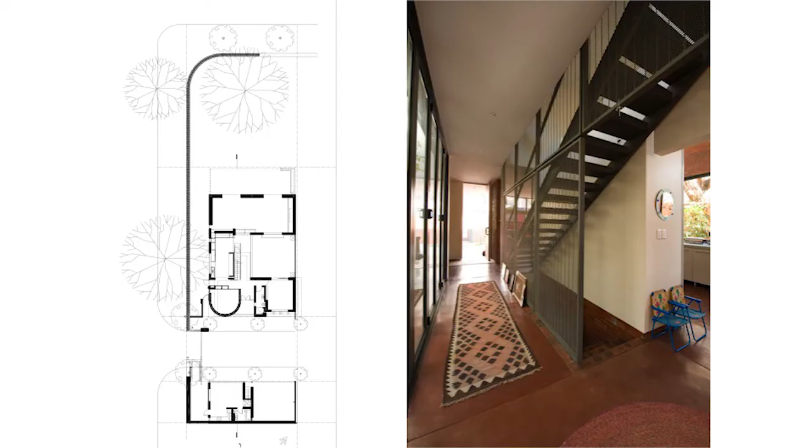Okay. Importantly also, all the units, although they deliberately share some materials and architectural elements, are all very different in plan. The houses become kind of demonstrations of the multiple design possibilities within the parameter of an identical site with similar accommodation and social requirements. The row house and the courtyard typology allow for both privacy and efficient use of space.

So here you can see unit number 1, Lael's unit. I think Lael's sitting here today. And it has a courtyard over here. Here's the street, and it has an outbuilding over here and the garden. And it's the end unit, and you can see a picture of the passage space. This is our own unit, unit number 3.

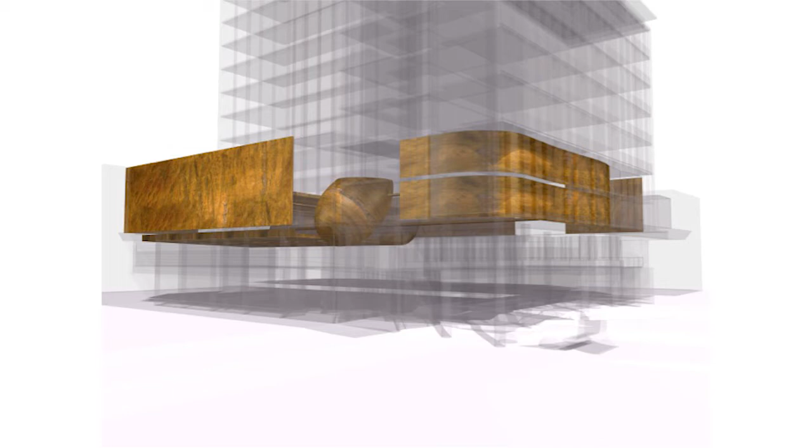So once again, when we return to the Wits Art Museum project, this is one of the very early competition sketches. And it's fascinating to look at it now because it really is very close to where we got to with the project. It illustrates the very strong idea of storing the collection, which was a big component of the project, to store the massive collection of African art and South African art in a very carefully climate-controlled way. The idea was to really expose that and show that from the outside and from within the gallery.

And then at street level, we really wanted to open the gallery up so that pedestrians could really interact with the exhibitions and be drawn into the building. So that's evident on Jorissen Street, where you can see the stores above and the open glass facade, which really pulls people in, really engages with the street.

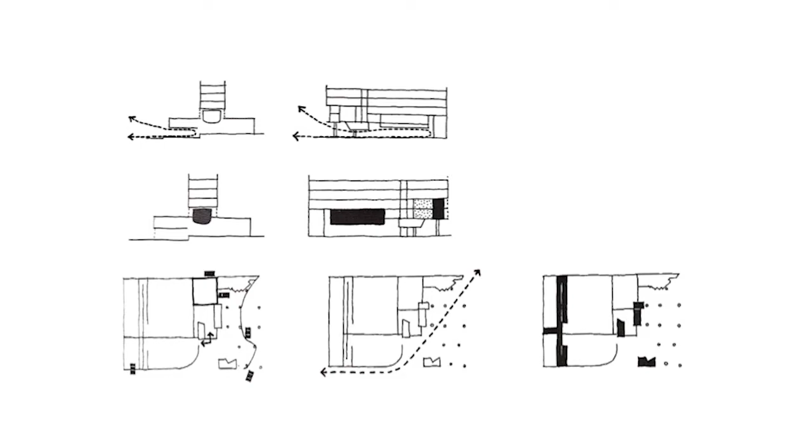And particularly the forecourt. So, the whole notion of it really becoming this gateway to the university. So really, confronting access to the university at a time when security was such an issue. We found a way of doing it. We differed a lot with our clients at the time, but these very early concept sketches illustrate this desire that we had to connect to the street underneath the stores.

And this shows the stores above. These are very early drawings. And here, this is the forecourt area, and all these drawings show how permeable we wanted the gallery to be at ground level. And we lost the battle, because as the project developed and the clients got very engaged with how they needed to work and Wits security got involved, we ended up having to put this glass screen between the pavement and the forecourt gallery.

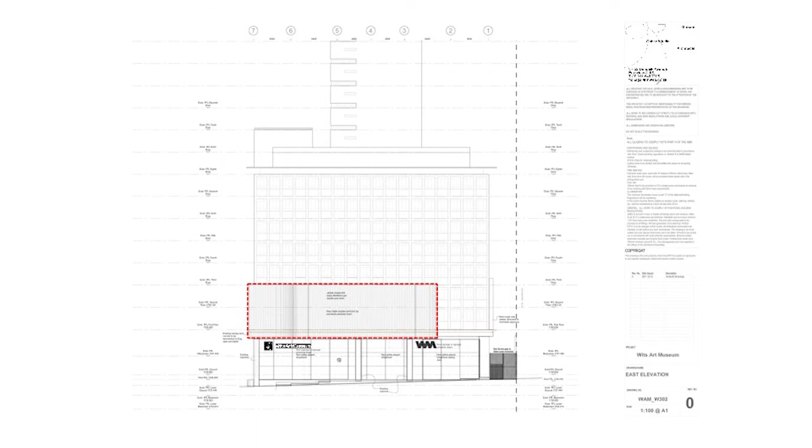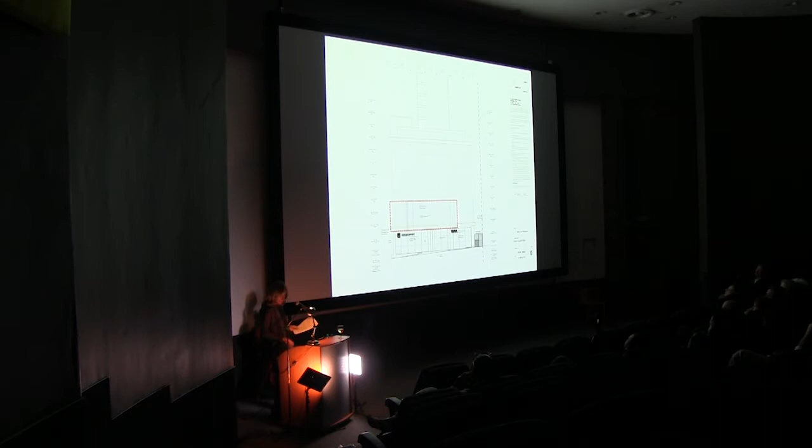And just to show everybody, a lot of people know the museum, but this is the 20-story building above, the Lawson's Tower, and these are the stores on this level and the gallery spaces below. We spent a lot of time talking, and Nina will elaborate later, on what to contain the stores in, and we arrived at the brick. And this became a real starting point for a lot of work that we continue to do in brick.

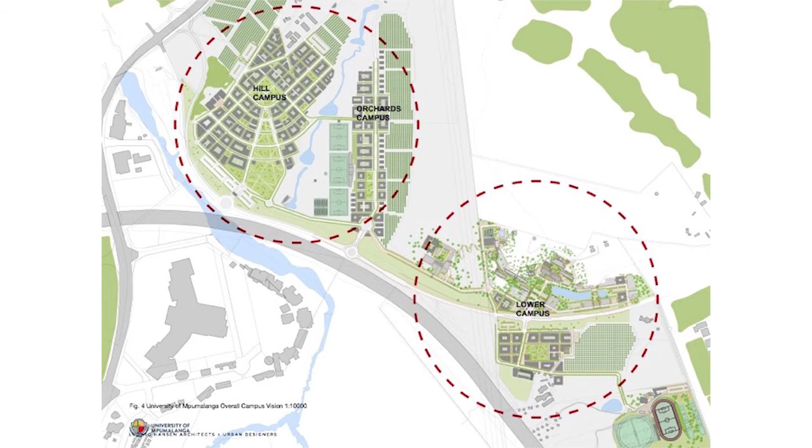Then moving on to, for the last 5 years, Nina and I have been engaged in projects for the University of Mpumalanga. I'm talking about concepts, so I don't want to delve into the whole context of that project. But just to say that the university is situated, this is in Mbombela, previously Nelspruit. The university is situated to the north. It has a strange shape. It's divided into what will be the Hilltop campus, the lower campus, and the Orchards campus. We work within a spatial framework done by Ludwig Hansen, and this is the area in which Nina, myself, and 3 other practices have built buildings.

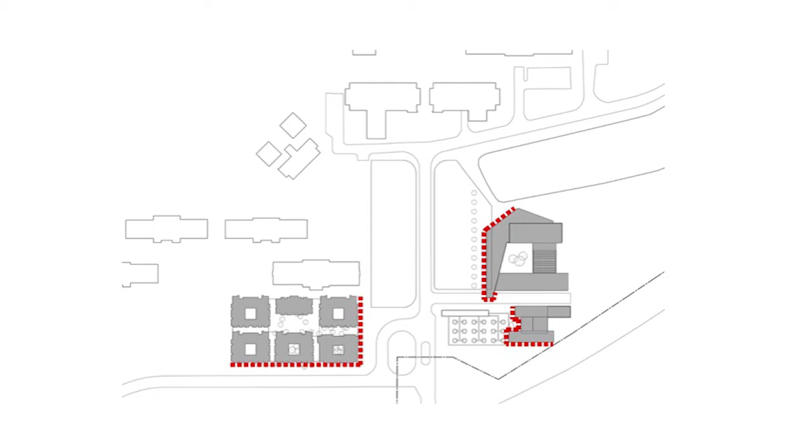It had to have a very hard edge to the square. It had to really act as both the buildings we worked on. We looked at trying to really create buildings that structure the square, one of the university squares between. And we came up with this notion of a wall. So this became our driving conceptual idea, where we would wrap a wall around a courtyard, and this wall would become this expressive element that protected from the harsh climate, because Mpumalanga, Nelspruit, Mbombela is extremely hot. And we needed to protect from the northwest sun.

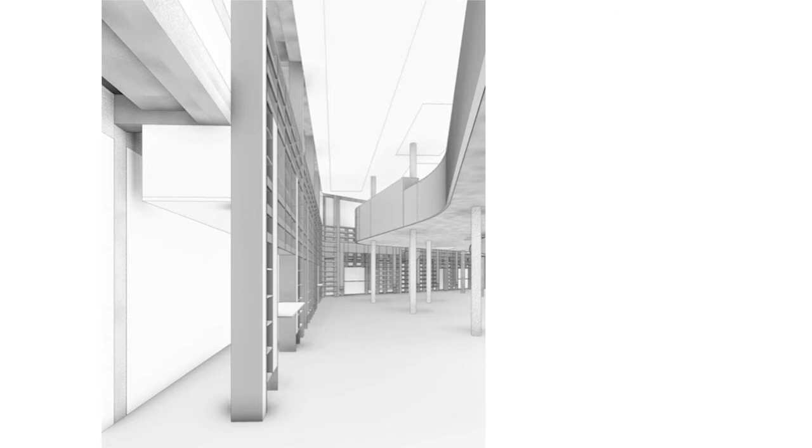So these are early developments where our idea was that it would be a double-story container that hovered over the ground plane. The project also housed an IT center, an auditorium, and some other facilities. And there again, we started working with brick. And Nina will go into the brick, but it became this extremely strong element protecting from the harsh light to the west.

Then within, so if that is the outside wall, we then pulled a meter away from that and created a screen of books, which really followed the curve of the external wall. And the section through the library shows how the body of the library hovers above what is once again the kind of theme we were dealing with in WAM, quite a permeable ground plane, which mediates public and private. And between that, a courtyard. So allowing the whole building to open into a courtyard space, which we will elaborate on later.

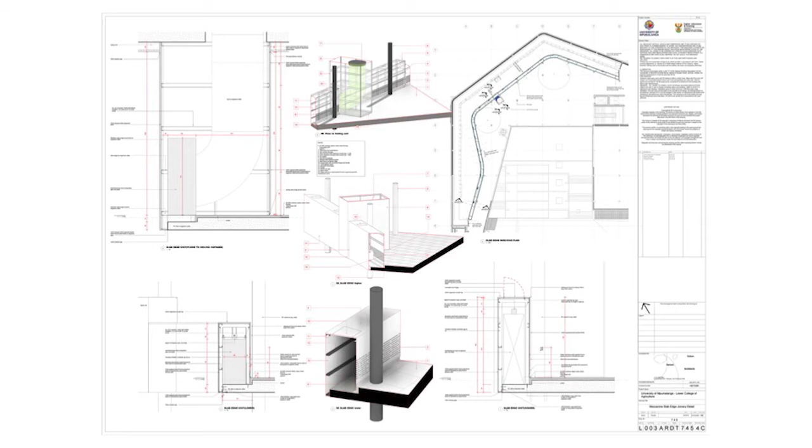And then the wall, the element of the wall, so this thickened wall with the book stacks pulling away from it. We also worked with quite an evolved system of ventilation, displacement ventilation, which we had to really try and integrate. It uses 30% less energy, but its ducting is massive. And this just shows how we constantly held on through early sketches to our wall design. At this point, we had a penetration through it and we were entering over there. But the later iterations show the resolved plan, which is really the body of the library around a courtyard.

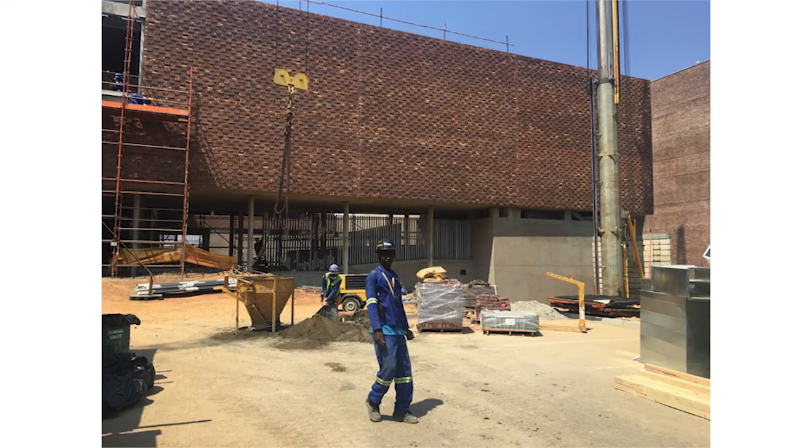And so there it sits, it hovers. It's interesting because of the very sloping site. It hovers above the ground but is almost on level with these existing quite strange water bodies. And that's it from the back and under construction. And then the bookshelves.

So we knew that because we didn't know how many books there were, we still wanted the shelving to be a very expressive element in our library. So we turned it into really a screen that houses a number of functions. So these are plenums for the displacement ventilation duct. These are obviously the bookshelves. And these are desks which are at bar stool height where people can sit and work. And up above is the balustrading level for the gantry above.

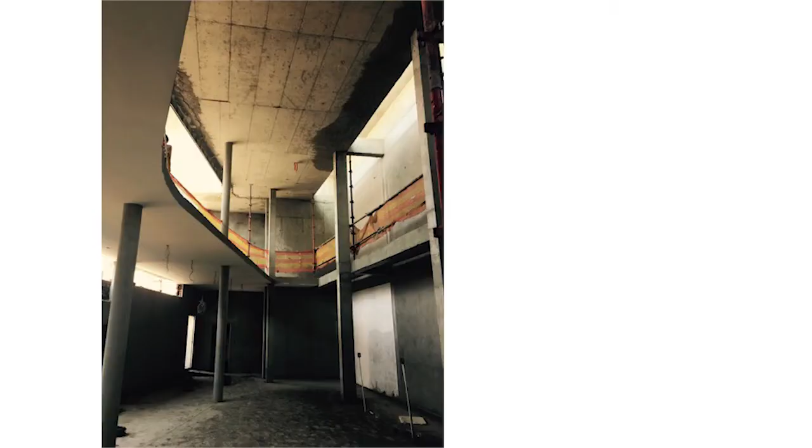So we've yet to see books in it. We are looking forward to seeing it actually open with books, which I believe it is going to soon. But it holds its own without books, and that was the idea. That's during construction. What's very nice is that the soft southeast light washes on the wall from above this and spills into the library.

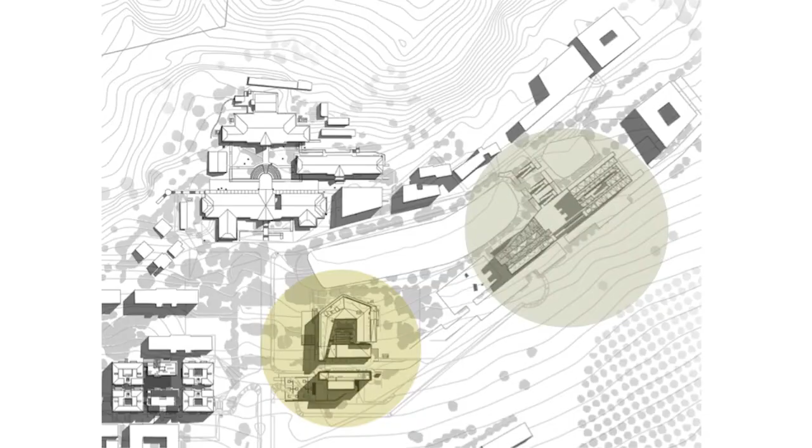Okay, then the recently completed building, and Mark Shearer is here. He worked very closely with us on this building. It's the administrative building for students, so it's where students come to register, and staff administration. And it is the termination of an axis from a long row of now very new teaching facilities up there. And there is a new public square in this place, and the road runs along the south of the building. And this particular campus actually ends here. So these buildings of ours are very prominent as you drive past the campus.

So we really felt in this building, because these two buildings were the last two buildings that we did in this phase, that they culminated in all the work we'd been doing on the other buildings. And it was this idea that we struck in the residences where we built very close together buildings which created these wonderful air channels and really started creating cool microclimates. And Nina and I became very fascinated with this notion where they would sometimes be strips and they would open out and become courtyard areas, and we sort of structured our building around this.

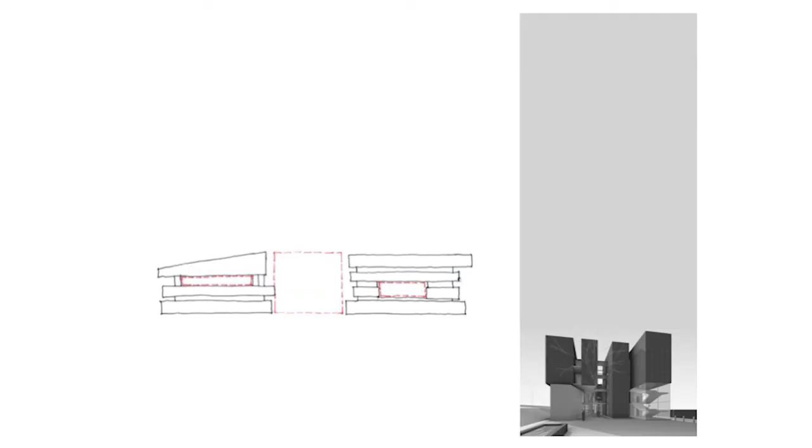So these are early conceptual sketches where we were looking at how our building bounded a large courtyard. This building has actually a first-story courtyard, and this one has a ground courtyard. But very clear is this notion of strips with thin circulation spaces that get ventilated. Here we were looking at how our building would respond to all the pedestrian routes, because it's full of students registering, it's full of staff related to student functions, and it has vehicles, possibly even buses at some point, taxis and bicycles running along the front of it.

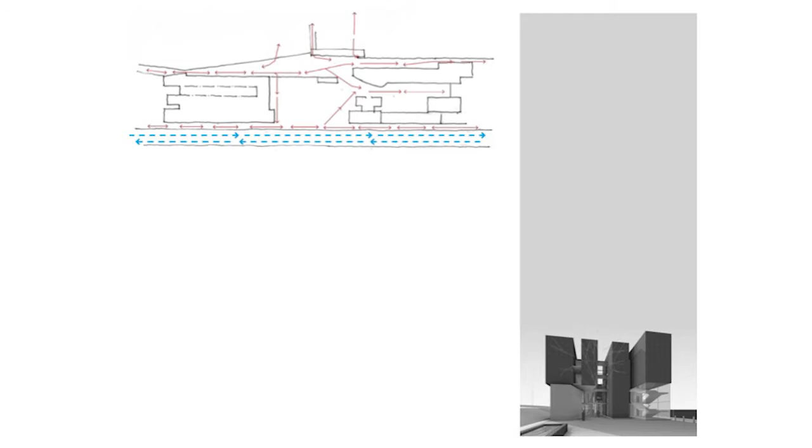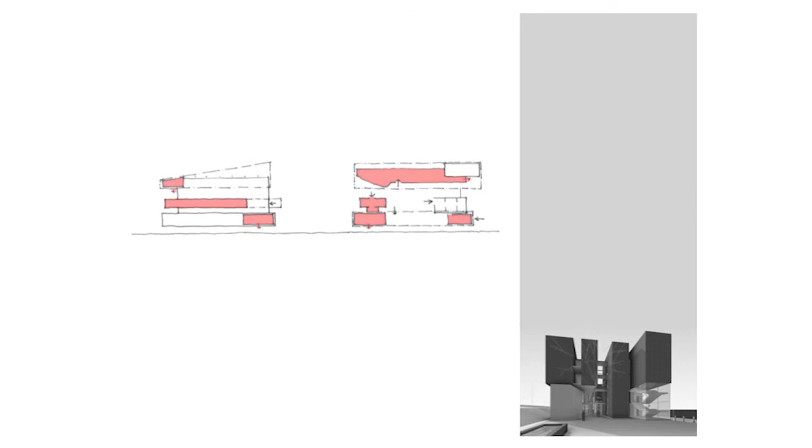We were also exploring notions of very efficient buildings. So we had two circulation cores near the square, bounding the square, and two on the north side there and there. And then the facade treatment became, well, not a challenge, but something one has to deal with: making window openings on a north facade in Mpumalanga is tricky. You can't have huge expansive openings. You need to have overhangs. And we were looking at how do we create these punctured smaller openings. And then on the south facade, because of lessons we'd learned in previous buildings, which we'll touch on later, we were looking at how do we dissolve the facade and completely open it up to views to the south.

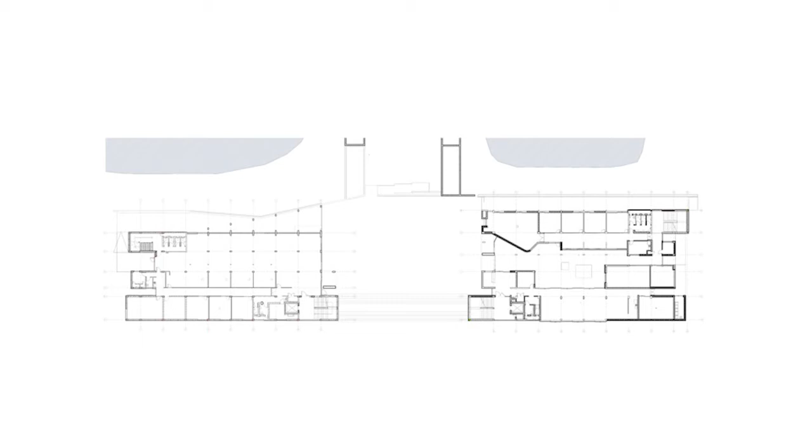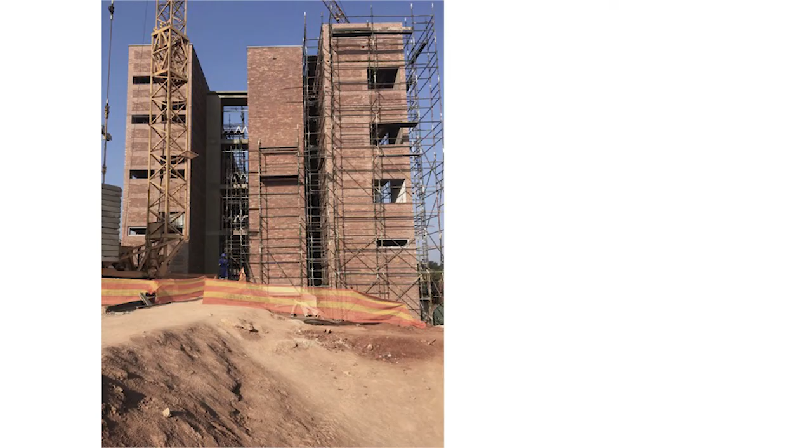And then we quite like looking at the final plans because we didn't lose the idea. We were able to hold onto the idea. And I think that's what Nina and I try and do in every single project. So these are the properly developed, built plans, which show the offices, the passages, the courtyards, and the strips. And we're proud of this building because it came in on time, thank you, Mark, and in budget, which is unheard of. So that's the resolution of the building. And Nina will talk more about the brick and how we dealt with the brick. And that's the building under construction.

Context is not only about the physical location of a project, but rather includes the social, urban, natural and economic contexts. We try to consider all of these as design drivers. We would like again to return to WAM to demonstrate how context informed the design.

The brief was to design a new 5,000 square meter museum for Wits that would have extensive gallery space and specialized storage facilities for the vast African and South African collection. The new museum was also to accommodate curators and related academic facilities and the necessary back-of-house functions.

The site was specifically allocated space in 3 adjacent buildings. The first was what's known as Dental House. It was the basement. The second was part of the Lawson's building. And the third was the building called Corner House, and it was the building which had the petrol station below it. The challenge was to seamlessly link these different buildings with individual character and structural systems.

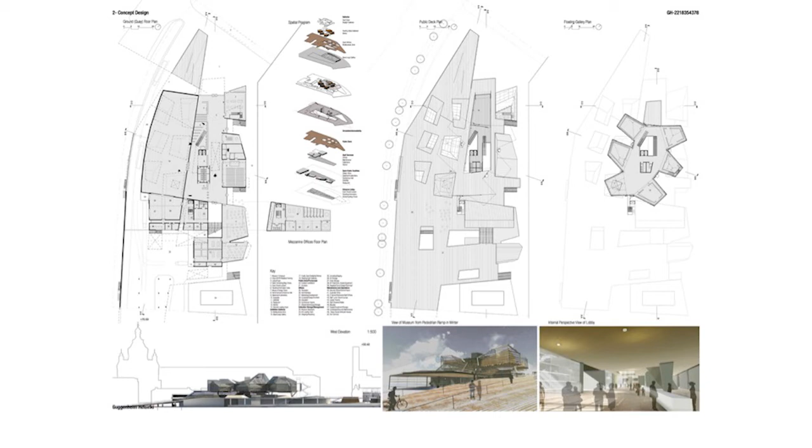So, yeah, you can see in the sections the deck with these iconic sort of timber structures, and we decided to use wood because we thought it was a good Scandinavian material.

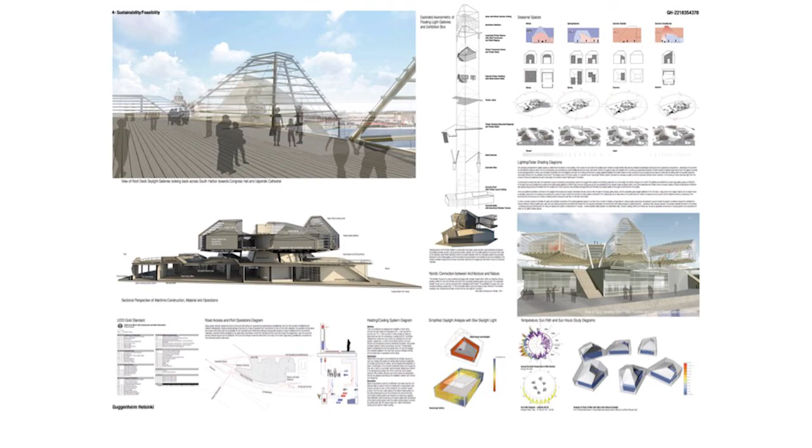Okay. So another competition, which demonstrates our response to context, is the Sol Plaatje University in Kimberley, Stage 2. The competition entry shown here was for the renovation and addition to existing buildings. The visionary urban design of the university was conceived by Ludwig Hansen. It is located in the center of the city of Kimberley. As such, it is becoming a groundbreaking urban renewal project. This renewal is evident after the first phase of its construction. Kimberley has begun to transform.

The integration with and opening towards the city reflects the attitude of equality in access to higher education in post-apartheid South Africa. The human and urban scale of the new university reflects consideration for the individual as well as the city fabric. University education is no longer only for the elite. The university building is no longer secluded in its own precinct, an ivory tower. Its public spaces are open to all in Kimberley. It is within this context that we framed our submission strategy.

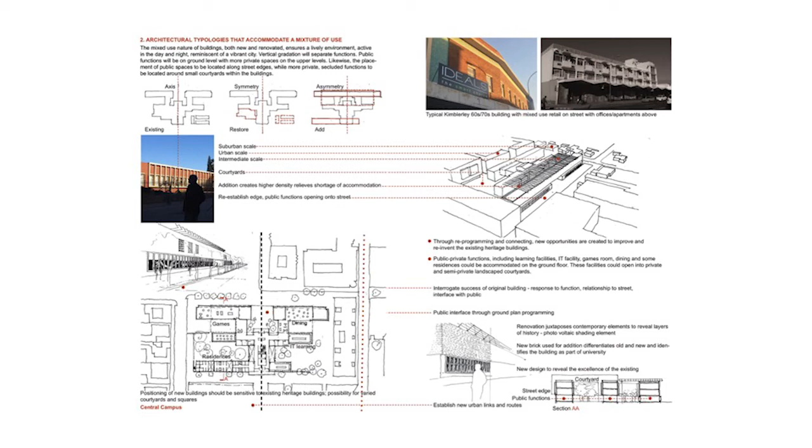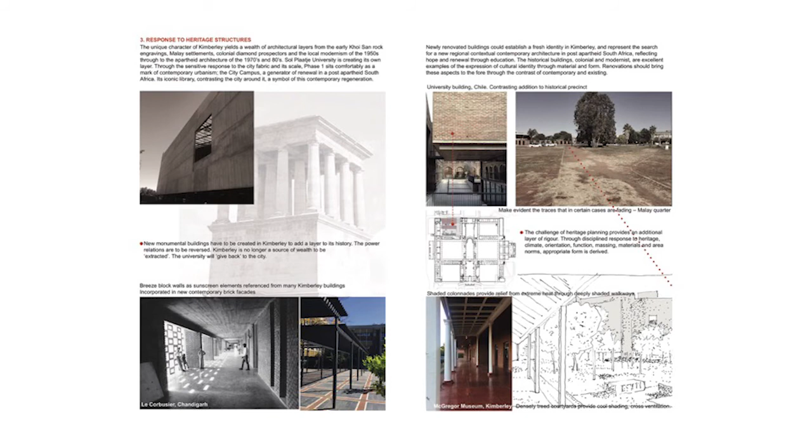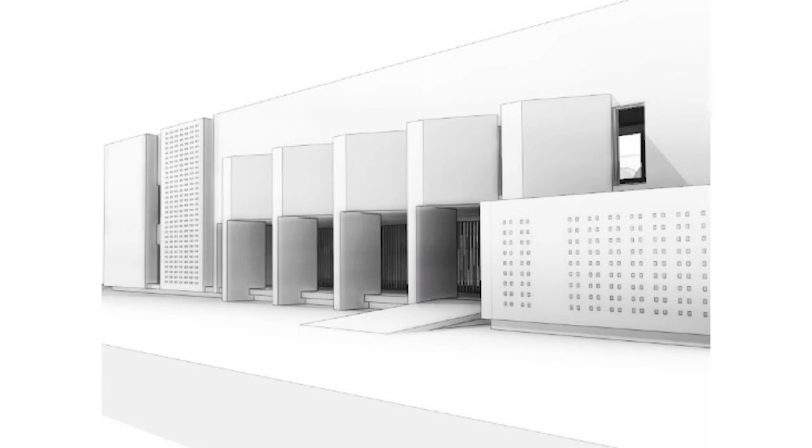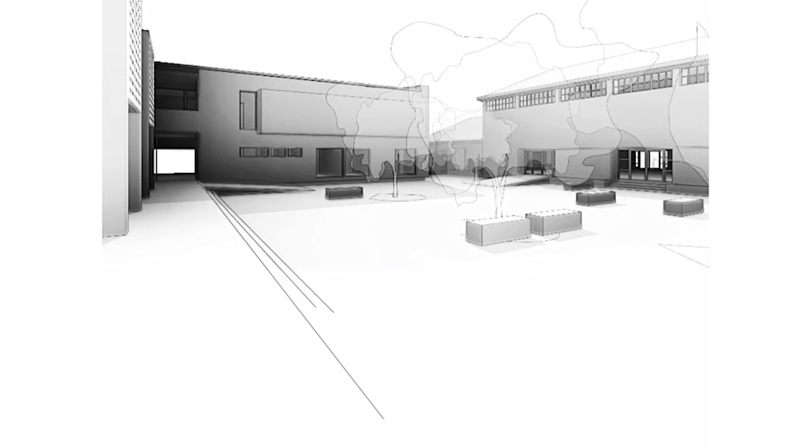We also touched on the complexity of conservation. Protecting a building that may be a symbol of colonialism, apartheid, and inequality is challenging. We see the opportunity to reinvent through reprogramming, creating a new layer of meaning while still acknowledging the past. This juxtaposition of past and present layers will establish a rich, contemporary, vibrant university city. We also dealt with strategies to deal with the harsh climate context of Kimberley. So just again to quickly run through the entry. And we did in fact win this competition and are currently designing our first buildings at Sol Plaatje. And here also just to quickly go through these slides, just in sketch design phase.

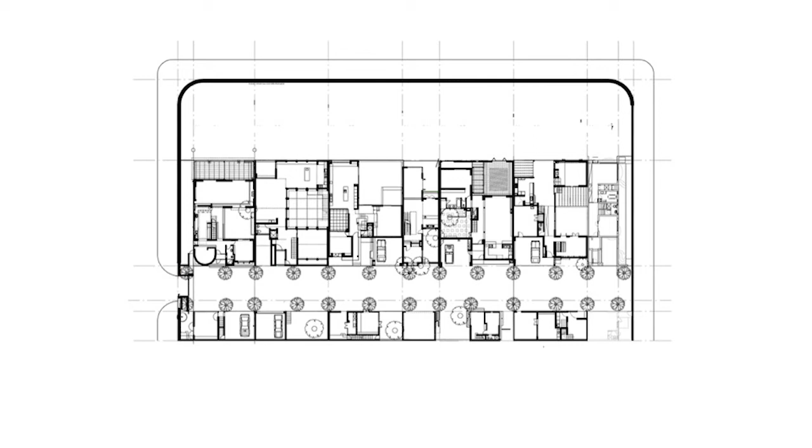So courtyard typology has been a design driver for many of our projects. They offer opportunities for passive cooling through cross ventilation. They are secure outside zones, and we believe they are underutilized as a building type in this country with its mostly temperate climate. So the 7 houses discussed earlier are row houses, each having their own courtyard. And this row house typology reduces the narrow, difficult to use spaces between units, but then one needs the courtyard to sort of mitigate that. And this figure ground drawing really is a beautiful drawing showing how the outside spaces find their way through courtyards into the fabric of the building.

Then to Mpumalanga. So the residences in Mpumalanga, we used the courtyard typology, which seemed appropriate for the residential blocks in that it creates public and private common outdoor space and is climatically appropriate. It facilitates moments of calm within the university environment as well as social gathering spaces. And so the most public spaces within what is quite a complex residential set of buildings are these public spaces which spill out into the courtyard.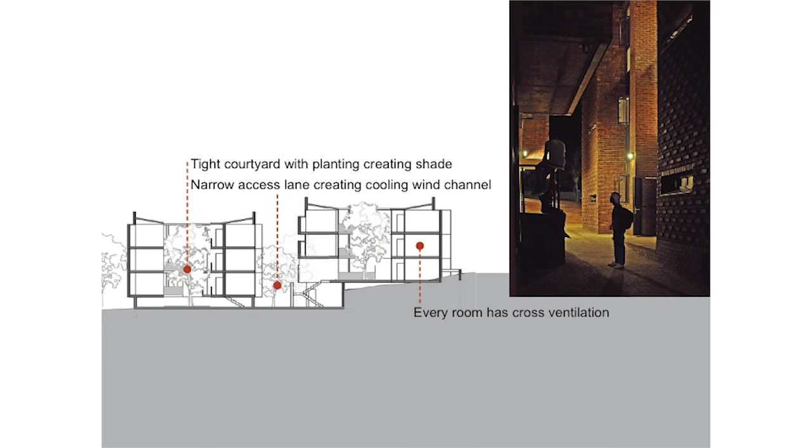And here we were looking at, this is really what the residence building looks like, which is a set of blocks, 1, 2, 3, 4, 5, 4 of which have these 3-story high courtyards. And this is the thin gully channels which emerged and created this really cool microclimate in the space. Each room has cross ventilation, which is very important in a climate like this, which is so unbelievably harsh, and these buildings are never going to be air conditioned.

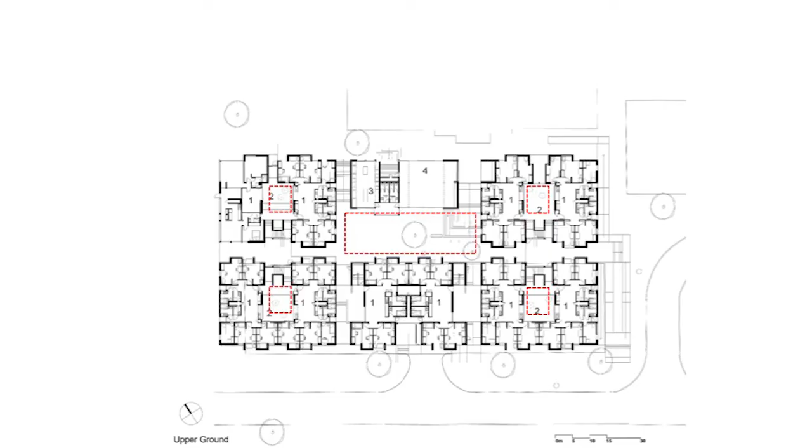So to look at the upper ground plan, there we have those public facilities that spill out onto that courtyard, the image of which you've just seen, and then the tight, or you could say 5 by 5 meter courtyards within each apartment block. And there again, they repeat in these blocks.

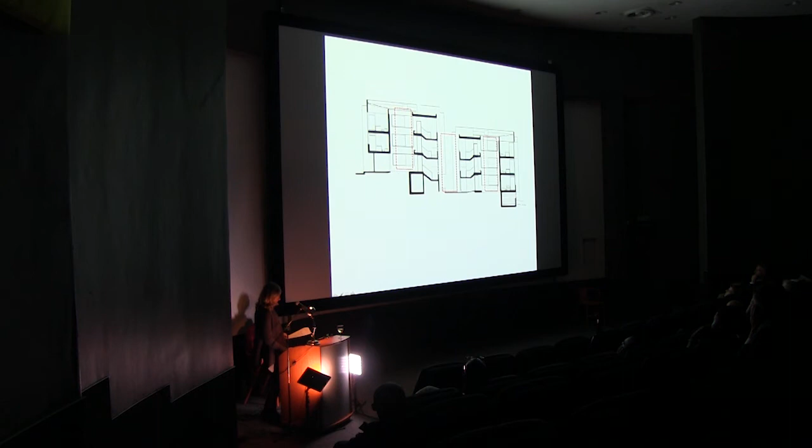And in section, looking at how even within the building is the courtyard, and between buildings, courtyard spaces. And the importance of creating these extremely cool, shadowed spaces. And that's once again the thin gully spaces between. I'd like to also just take this opportunity to talk a little bit about one of these blocks.

Okay, so this building, the residential building, of all the university buildings that have been built, we've been told, is one of the most efficient. And a lot of it is to do with the fact that, as you can see, there's almost no circulation. So this is the plan of 2 apartment blocks entered from a common staircase. You either enter left or you enter right. When you enter left, you come to a common space, which is mirrored on the other side, opening to the courtyard.

And then from there, you enter the bedrooms and a bathroom block, which breaks away from the whole notion of ablution, but are these small, little, intimate bathroom spaces. So we really try to create more of an apartment-like way for students to live rather than an institutional type of environment, so common in residences.

These courtyards were not designed by us, and they're very sort of early days. But when these 3 large indigenous trees grow, I think those courtyards are going to be absolutely beautiful and breezy and create these wonderful microclimates.

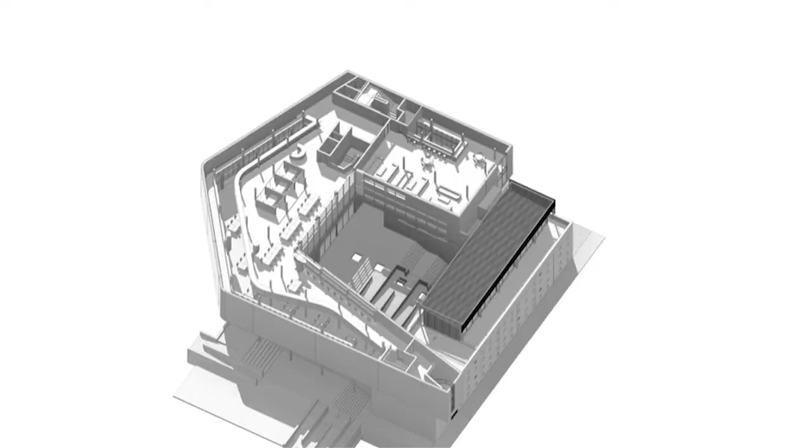Okay, then the courtyard of the library. So the library wraps the wall that I've spoken about, wraps around here, and that is the inner courtyard of the library, which has a very sort of different open nature to the outer wall. And that is how the wall reveals itself on the inside. The courtyard is like an outdoor foyer.

So one enters the building through security zones over there, and you are in the secure precinct at this point. And from that secure precinct, you then enter the body of the library, or you ramp down or ramp up to enter what is the resource center on this side, or you enter the auditorium. So it really becomes this secondary kind of a public space. And just the cool, as you enter, the cool undercover colonnaded spaces that are successful in this project.

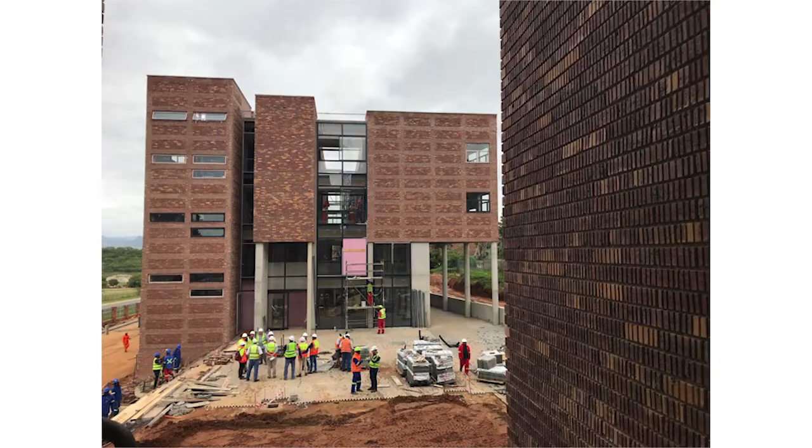And then looking back, I like this because of the scale, and it just shows the relationship of the student administration building to the courtyard in front of it, bounded by the building on the other side.

So you've probably noticed by now that our preferred building material is the brick. Brick is a tried and tested traditional South African material. It is familiar to all contractors. It is available throughout the country, varying in accordance with the local clay and brick yards. Bricks are robust, they're long-lasting, and require no maintenance.

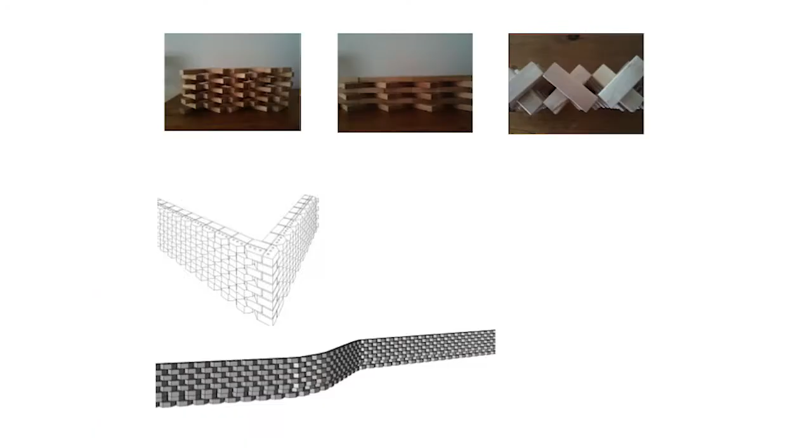Their simple modularity allows for infinite amounts of configurations, bringing unique patterns and textures to each building. The material formed from clay and the intricate patterns created by the design are both reminiscent of African pottery, weaving, and beading.

Our love affair with bricks began when searching for material to clad the WAM stores. This, as discussed previously, was a central aspect of our concept, and we had always thought of using something shiny. While playing with these children's blocks, we became very excited about the possibility of brick. Not only would it relate to the African treasures within, but would also reference the hundreds of brick buildings throughout Braamfontein and the Johannesburg CBD.

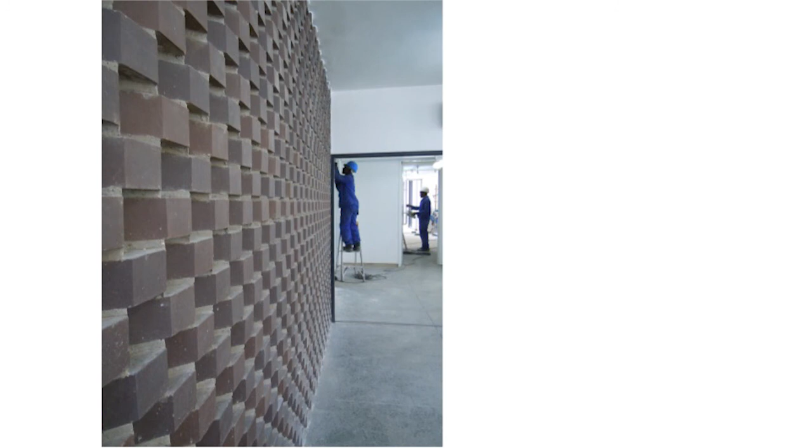We decided to use a double-cant dark brick by Corobrik. The brick face projects from the edge of the corner building. So you can see over here, that's the existing building, and that's the new brick face. And the shape we copied from the curve of the mezzanine of the existing building, which I'll speak about later as well. So here you can see the brick, different views.

Okay, and this brick in a way becomes the icon of the museum, pronouncing itself to Braamfontein. Okay.

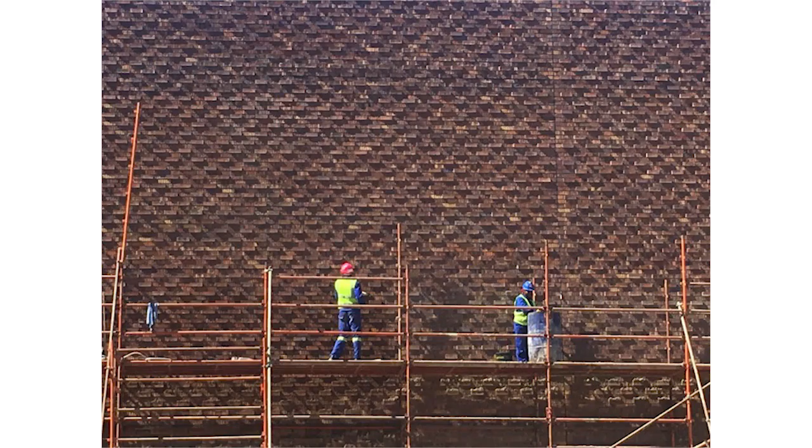Throughout all the buildings we designed at UMP, we have used a variation of brick configurations to create patterns and textures. As part of a drive for the building of the university to benefit local industry, we chose a brick manufactured in a nearby factory. We played with the juxtaposition of its smooth front face with its grooved back face to create textures and patterns.

The external skin over here of the administrative building is also made of face brick. The brick has been laid to form a subtle grid section, and we achieved this by creating a smooth grid of brickwork with a slightly projected grooved face of the brickwork as panels. And this also became the grid through which we developed the windows. So the openings of the windows, you can see, worked with this grid.

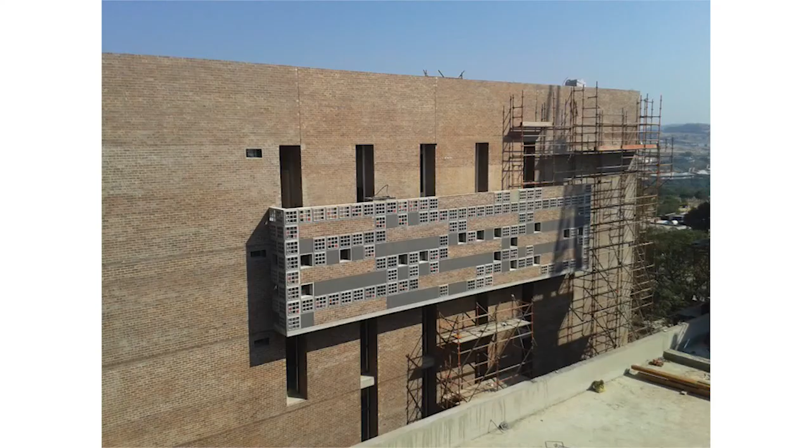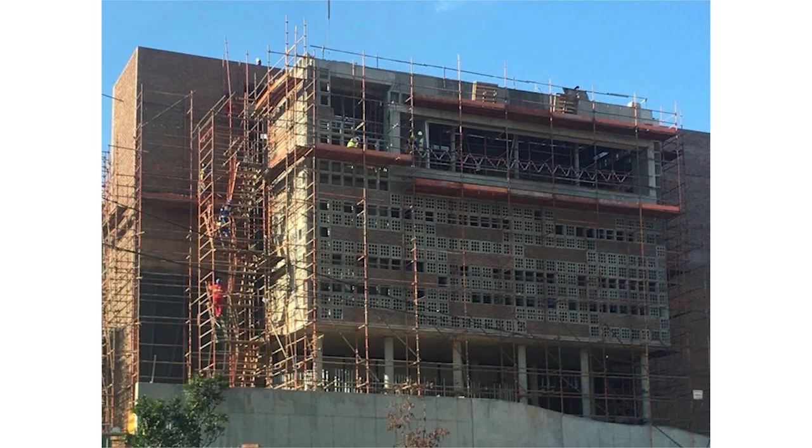Okay, and as a variation to the residence screens, for the executive office buildings we combined brick panels with wind block, terracotta tiles, glass, and rough cast plaster. Here you can see the screen. So that's on the north facade of the building. And here you can see the screens on the south facade of the building under construction. And these screens were later removed because even though they were successful for sun protection, it was felt that they blocked the beautiful view to the south.